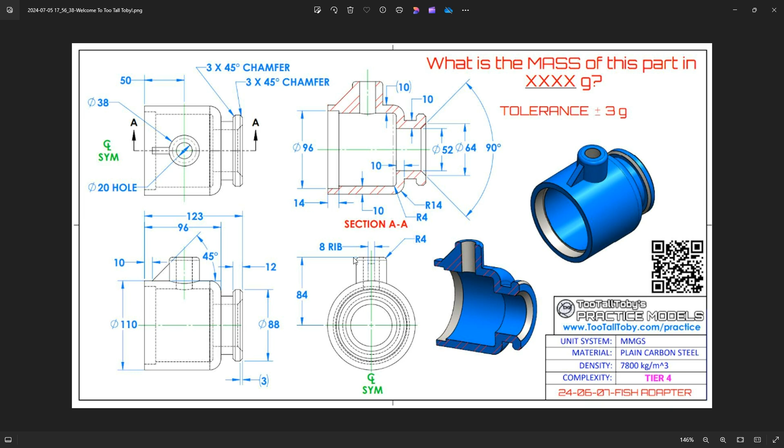So just add 20 to that, giving us 72 for this thickness. Then we need to put a cylinder on top with a value, and we can shell this model 10 millimeters all the way through, except up here where we have a 38 hole and a 20 millimeter hole, so that won't give us the right thickness, so we'll add another hole there. We can add our rib and give it a 45 degree angle on that rib. It's fairly simple, and we have our height dimension for the top of that cylinder. Let's go ahead and design this in IronCAD.

Let's hop over there. First, we're going to set our units here to millimeters, and we're going to do grams as well. We're going to drop out a cylinder to start off with. The overall diameter of this is 110, and the initial length is 96, so we'll type in those values to get our starting point.

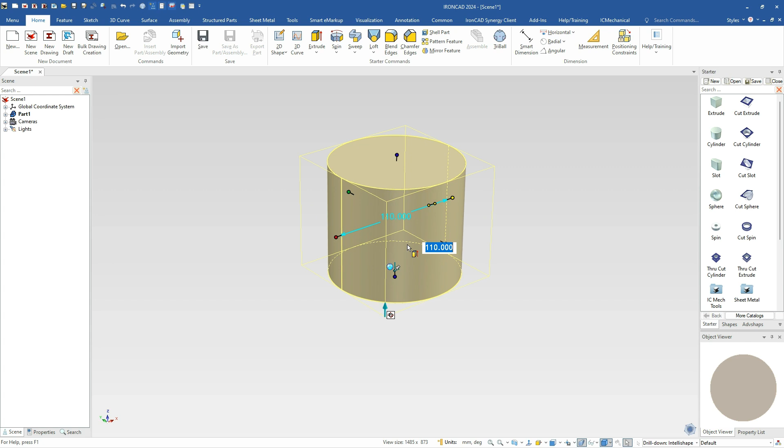This is our starting cylinder, and we're going to drag and drop another cylinder here, as we've done in many other videos. We can drop it right in the center on this point, then do an edit distance from here to the back. Another way is to actually move this back to here, since we don't physically build relationships on geometry like you'd find in structured systems where that's attached to that face. If I pulled that, it would extend it the other way. IronCAD is free to move this geometry around.

So now I moved it to the back side, and I can set the total length. I can set 123 for that total distance, and again our diameter is based on that 52 plus 20, giving a 72 diameter inside there.

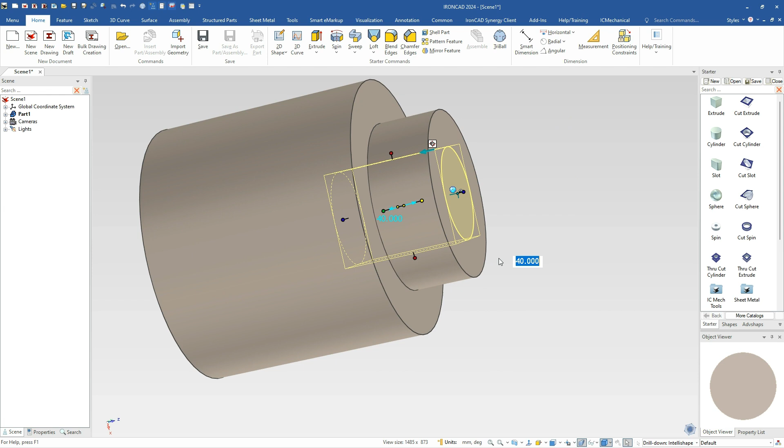Next we'll add our outside cylinder here. This one's going to go the opposite direction, so we'll right click and reverse that. We'll set the diameter for that one, which is 88, and its thickness. If we look at our thickness here, we can get this back handle, which we know is a total thickness of 12.

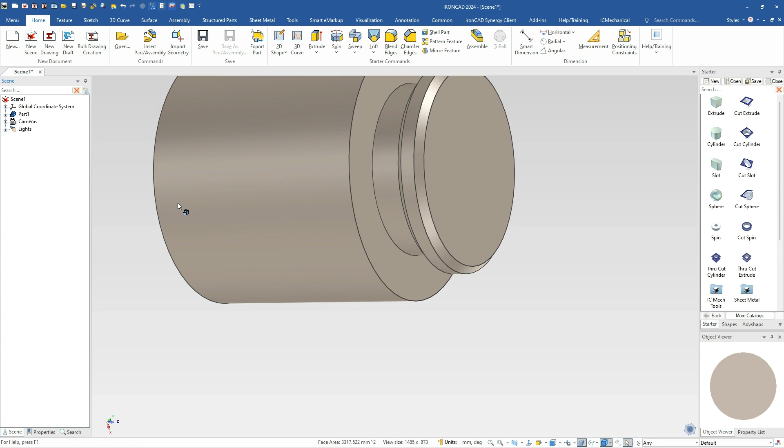While we're here, we can go ahead and add the chamfers. If we want to add the chamfer, we right click on that, say chamfer edge, and we're going to do a distance angle of 3 and 45 inside there, so it's 3 and 3 either way to build that. That's the chamfer on those two edges.

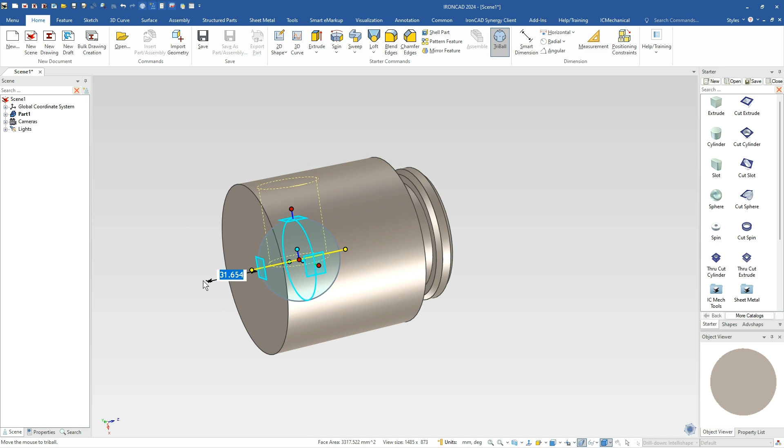Next we'll go ahead and put this cylinder on the top. We'll drop our cylinder right on this point here, since that's the center location we need to define the height. We'll use our TriBall to rotate this up negative 90 degrees, and move it the distance specified, which on this one is 50 millimeters. We know the overall height of this is 84, and we also know the diameter on this one is 38 as well. So we've got that geometry created.

Last, we'll go ahead and put this blend here, which we know is set to a value of 14 millimeters, and hit OK to apply that. Now we can do our shell.

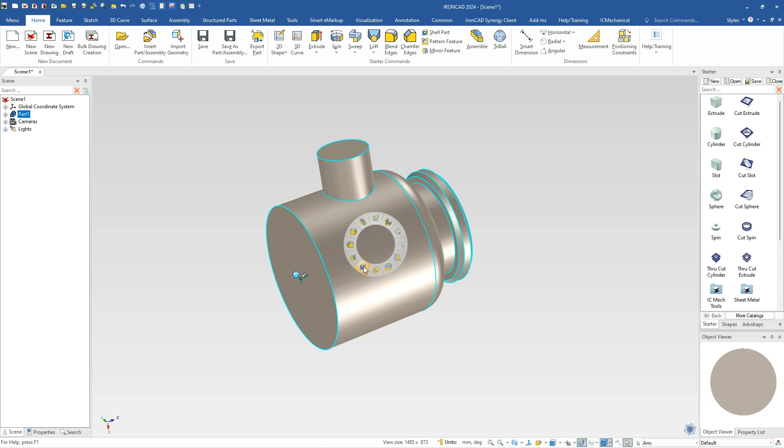We can access our shell a couple ways. One is up on the ribbon bar. You can select your part and hit the S key. It's also located right there, or you can right click on the part and hit shell as well. What we're going to open up are these faces here, so we have a 10 millimeter thickness all the way around.

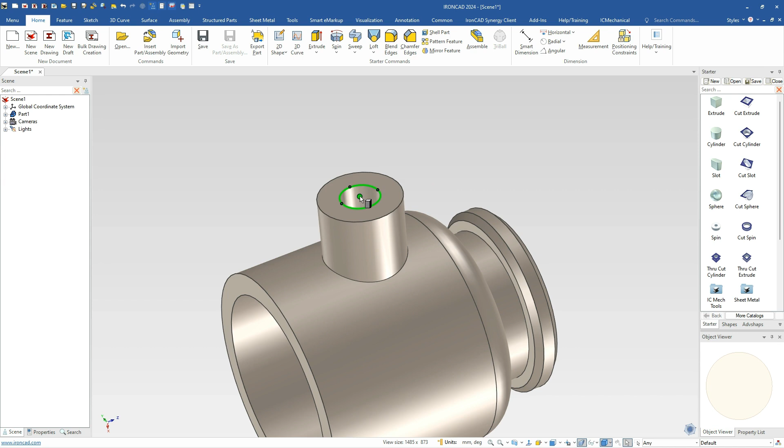We're going to pick this top one again. We really don't need to pick that one, but we'll pick it anyway just to show you what I mean, and we'll pick out this top face here as well. This will create some interesting geometry because of that chamfer, but we're going to cut that off anyways. Since this is 38, a 10 millimeter shell isn't going to keep this diameter correct. If we look at this, it's going to be 9 instead of 10 millimeters. So we just need to drop another cylinder onto this hole here and set that to a 20 millimeter hole for that one.

So that's an easy way to cut that out. That gives us our basic shape there. Now let's go ahead and work on this piece here. We're going to cut this out anyways with another cut on here.

We're going to hold our shift key down, select this edge, and drop it right on the center. We know that diameter on that is 64, and the depth really doesn't matter. I can pull it in or out. It doesn't matter where it's going, because what we're going to do is change the taper angle on this. So we'll right click on that and go to surface reshaping.

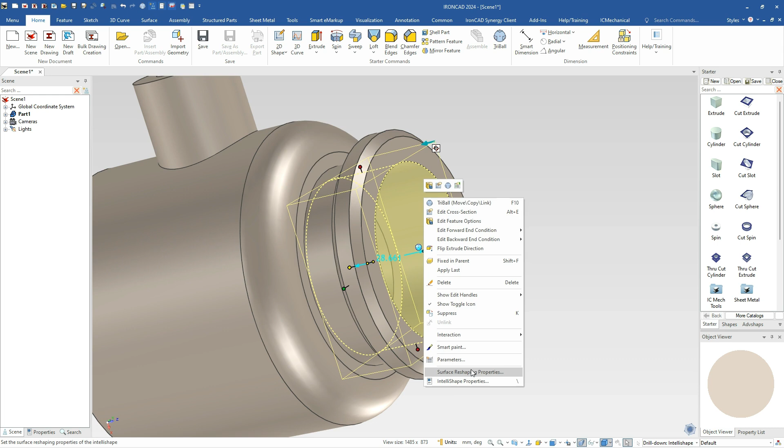We have the side taper here. We're going to select that and say negative 45, since we want it to go inside the part. So we say negative 45 and cut that out, which will cut that into our geometry. Again, this outside edge, if we look down here, is 32, which is 64. And this inside should still be the 52, which is 26 times 2. That gives us that shape there.

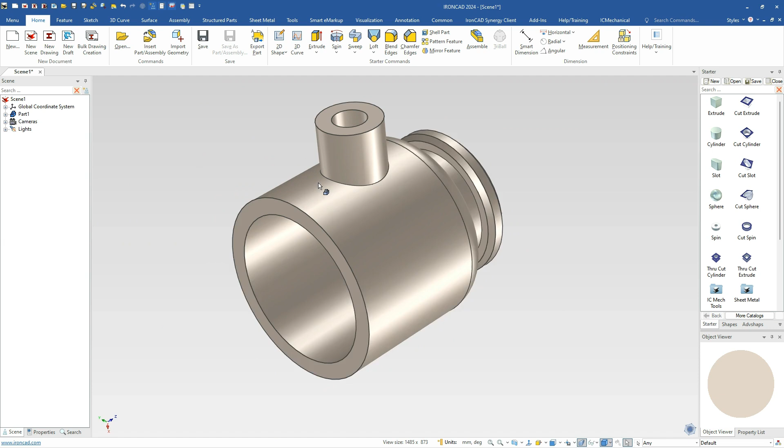Next, let's go ahead and add our rib geometry here. We can go to our shapes catalog, drag and drop a rib onto the center point on the top. Then we can use a TriBall to rotate this around. So we just rotate it up 90 degrees, and we'll rotate it around 180 here as well.

Next, we can align this to our front face, and we'll pull this in here. It doesn't really matter, just somewhere in here is where we want that. We know the diameter on this rib is 8 millimeters, and we need to offset it from that front edge 10 millimeters. To do that, since we know the overall length and it's aligned at that face, all we need to do is subtract 10 millimeters from that to give us our offset.

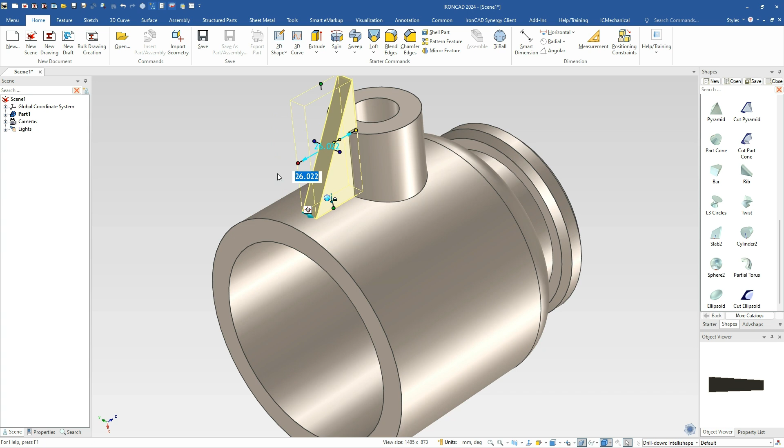Now that we know this value here, one thing you can do is double click this. We know this value is 26, so we're going to copy that. We'll go up to this top handle, double click on it, and hit Control V to paste. That will make the distance for this and this equal, giving us an actual 45. If you wanted to see that, you don't have to go into any sketches - if you select those two, that's going to show an angle of 45 right there. So that's an easy way to do that.

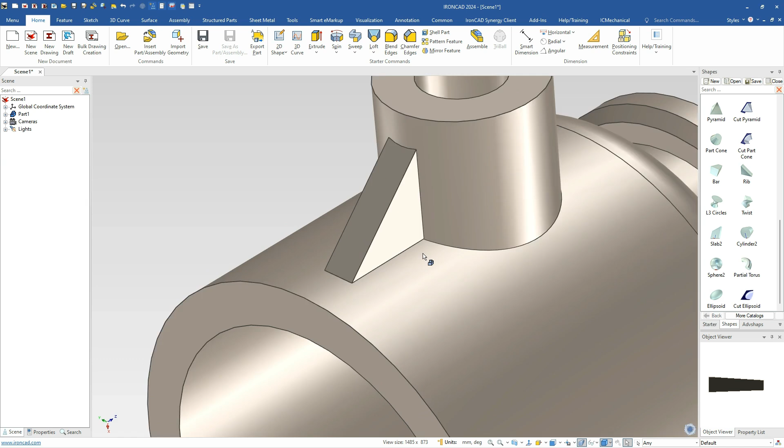One other thing to notice is it creates this little gap here. We can leave it off if you want, but if you want to make it nice, you can extrude that down. But notice, since this is on this edge, it's actually creating a non-manifold case - there's a split edge right down the middle. So if you select that bottom face, for example, notice it's only going to select that half of it. We want the whole face.

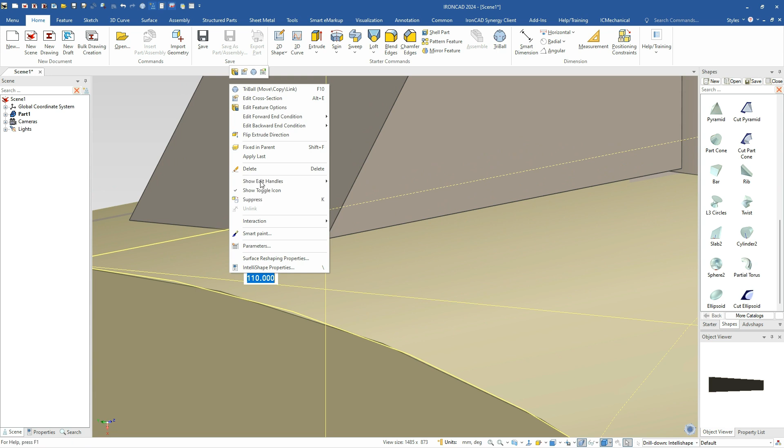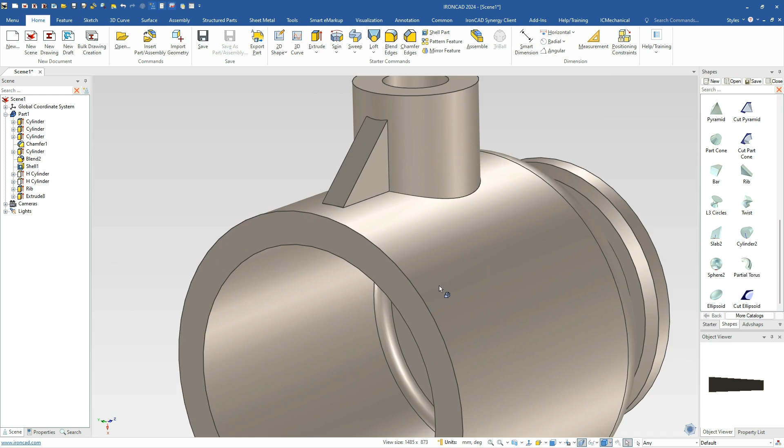So one way we can handle this is to just suppress this cylinder by right-clicking and saying suppress. It's going to tell us those blends are failing because it's gone, but that's okay. We're just going to go to this bottom face here and pull it down to extrude a little bit of material. Go back to our scene browser - there's our cylinder that we can see suppressed. We can unsuppress that, and all of our blends will come back along with everything else, and now we see our little extra material added there. That's just an easy way to make it completely closed at the bottom.

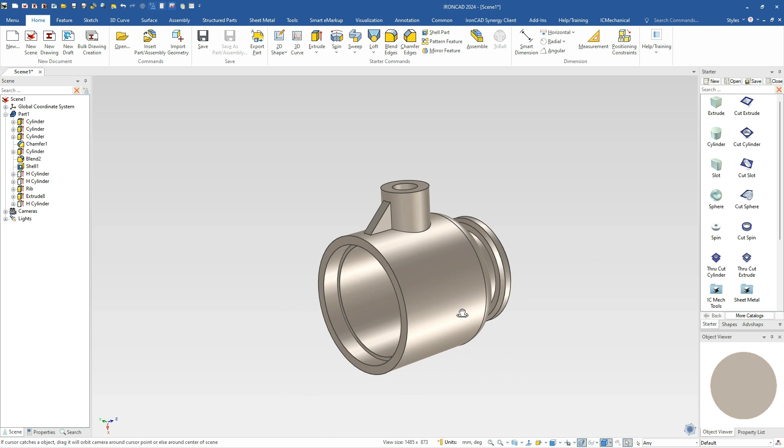Last, we'll go ahead and add our next cylinder here. We'll drag and drop it to the center, and this has a diameter of 96. It's got a depth too, so once you hit enter twice to get to the depth, set that to 14. That builds our model for us inside of here - fairly simple, mainly cylinders again, with no sketch geometry on this one at all.

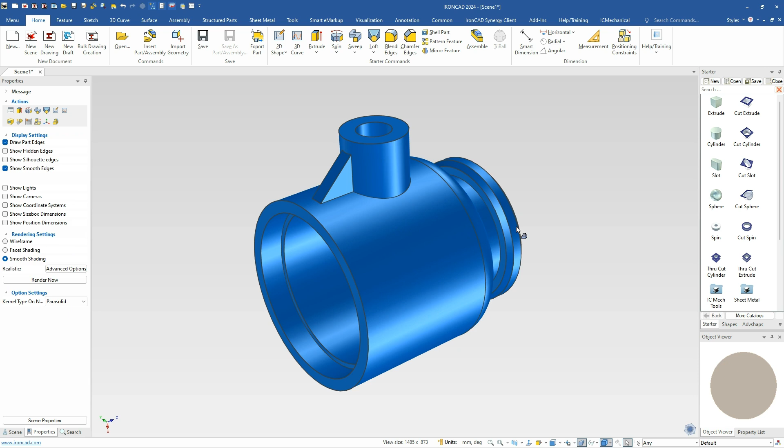Now we can go to our properties. Our density for this is 7800, so it should give us a mass of 3224 for that model. So that's how you can build this one in IronCAD. Again, we're trying to avoid some of the sketch geometry here - you can build it with sketches if you like, but we're showing you some alternates and differences between structured modeling, where they build automatic relationships, versus where we can avoid creating those and dynamically change geometry like we did for this cylinder. Hopefully you find this useful. We'll see you on the next one. Have a good day.